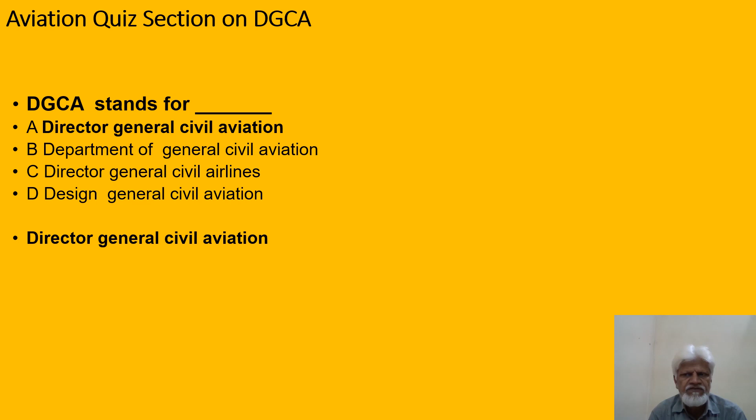The first one: in a quiz, if it has been asked the elaboration of DGCA, it is Director General Civil Aviation. Head office is at New Delhi.

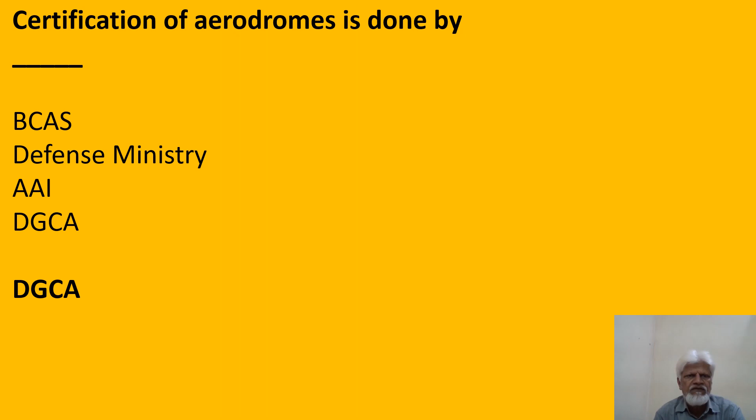Issuing of license of pilots, aircraft maintenance engineers, air traffic controllers, flight engineers, and conducting examinations are being done by DGCA.

Conducting investigation into incidents, serious incidents involving up to 2,250 kgs all-up weight, and taking accident prevention measures including formulation and implementation of safety aviation management programs, is also done by the Director General Civil Aviation.

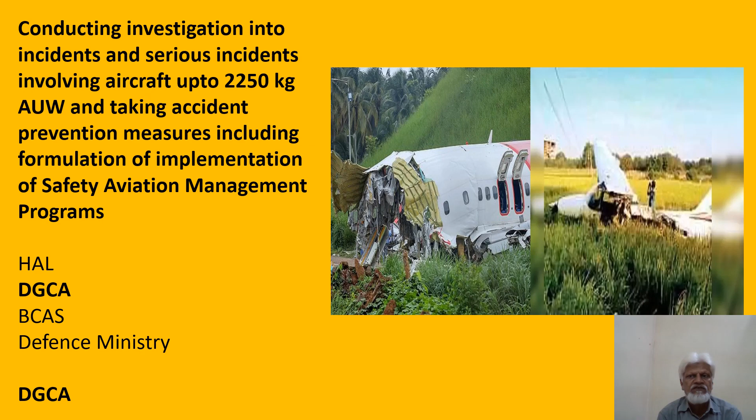Promoting indigenous design manufacturing of aircraft components by acting as a catalytic agent. DGCA, the AED department, does it.

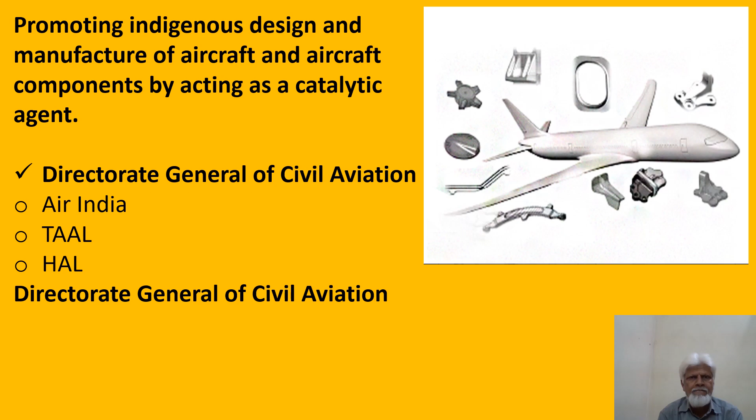Approval of institutes engaged in flying training, that's your flying clubs, training of cadet pilots, the SPL, is done by DGCA.

The role of Parliament and Coordination section of the DGCA is to address all the parliamentary matters like notices, questions, circulation of provisional calendars, guidelines, procurement and dealing with parliamentary questions, action taken reports, minutes of senior meetings, updating Civil Aviation Ministry for Parliament questionnaires.

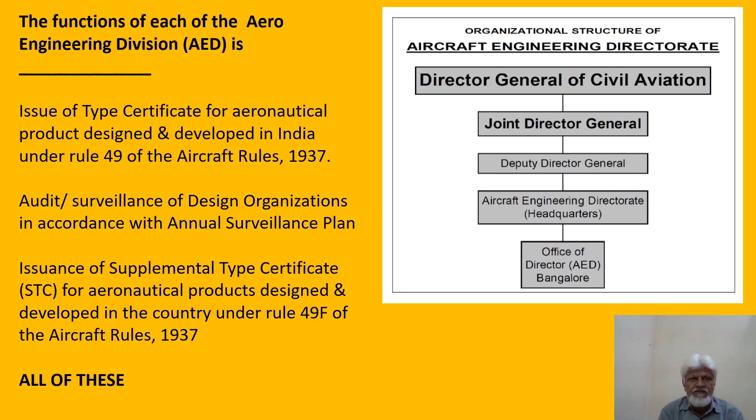Flight data recorder or cockpit voice recorder, also called black box. The role of the Flight Recorder Laboratory of DGCA is to engage in monitoring of CVR and DFDRs for the purpose of ensuring continued airworthiness of recorders and crew performance.

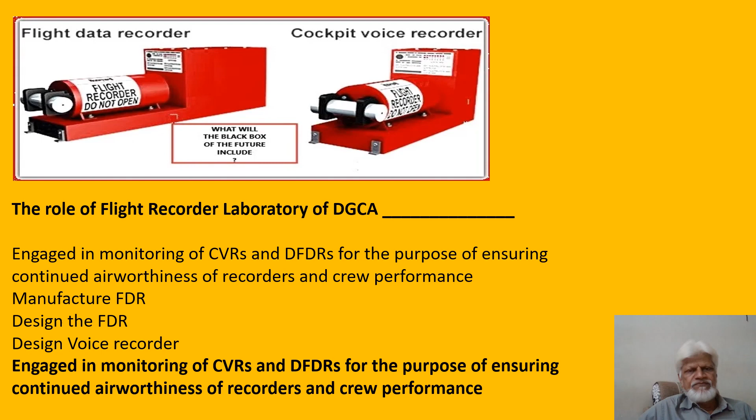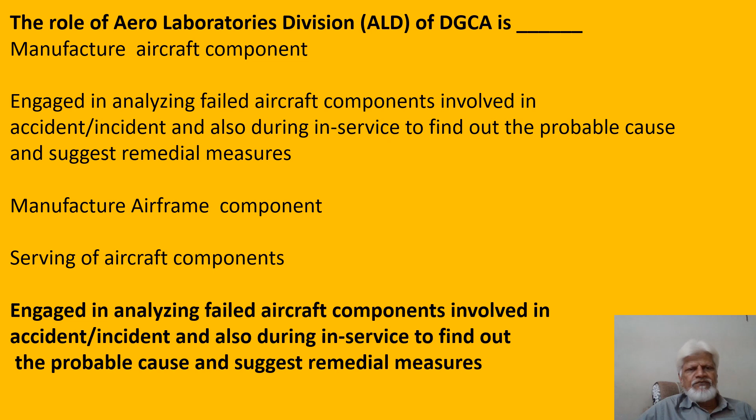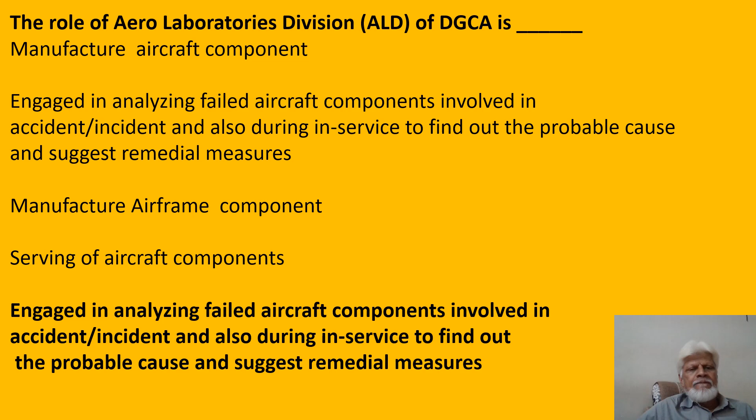The role of Air Transport Division, ATD of DGCA, is approval of flight schedules, scheduled domestic airlines, Indian carriers for international operations. All are right.

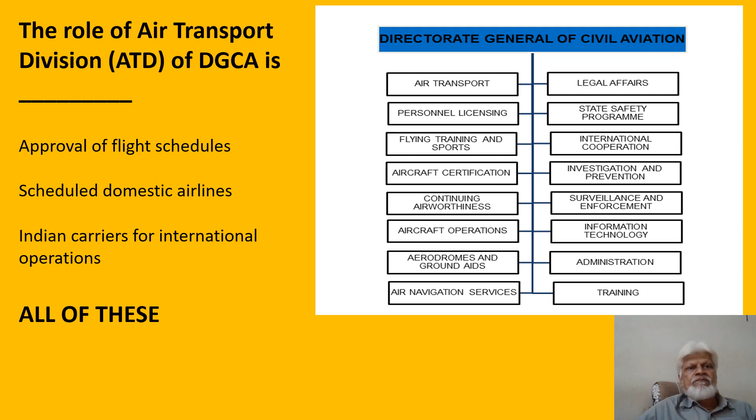It's been mentioned here, the departments of DGCA. Review of preparedness of Indian carriers to new international destinations in respect of operation, engineering, safety, security, ground facilities, is being done by the Air Transport Division.

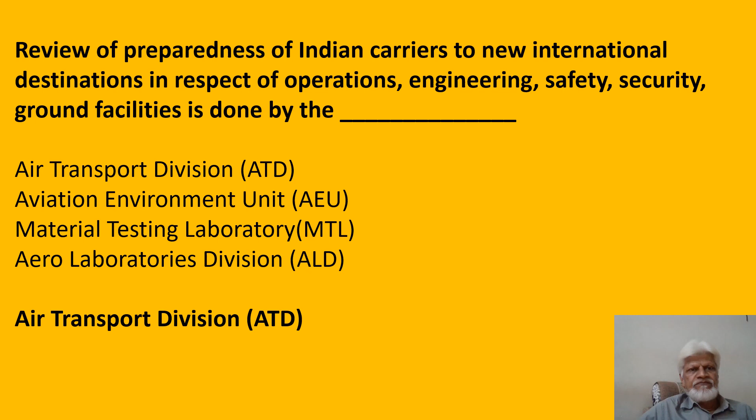The function of the Aviation Environment Unit, AEU, is to take care of environmental factors, to disseminate the guidelines and measures adopted by ICAO to stakeholders in respect of environmental protection, in terms of carbon emission, noise pollution; certain standards have been laid down by ICAO.

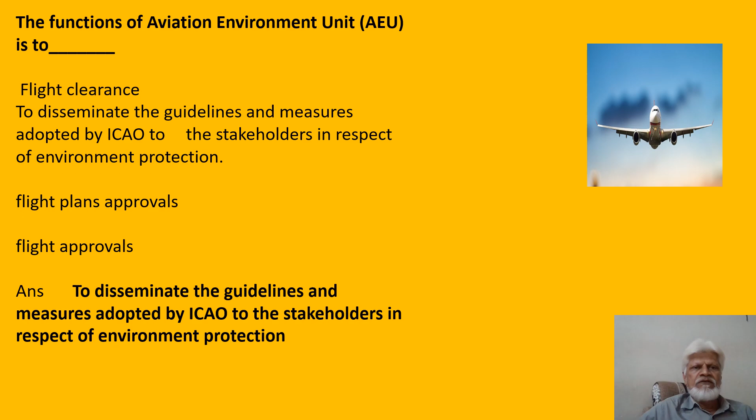The main function and responsibilities of the Airworthiness Directorate of the Headquarters DGCA is all the above, what they maintain here.

Develop national legislation, standard, policy, guidelines, examine the changes in ICAO, the aircraft rule, the civil aviation requirement CAR, filing of appropriate differences, establishing work relationships. All the answers are right.

The Flight Standards Directorate in DGCA is entrusted with the responsibility of certification of air operators, that is your airlines, designee oversight, and PEL support.

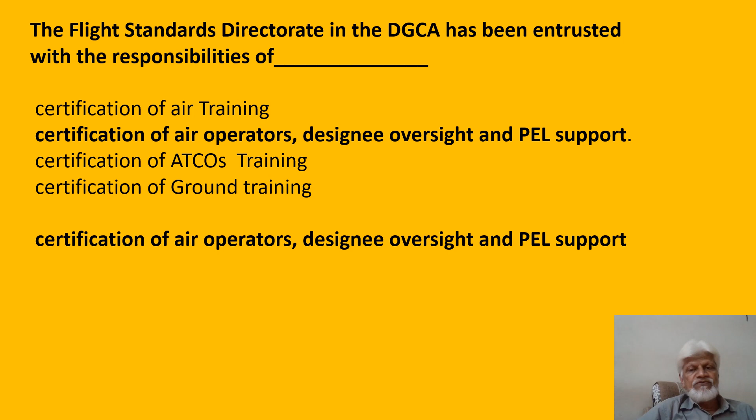Official website hosted of all government owned organizations, not only DGCA. The right answer is NIC. Always the website will be having an extension NIC, that is National Informatics Center.

DGCA is a part of the Civil Aviation Ministry. You can see the Civil Aviation website; this is the Director General Civil Aviation. They have BCAS, the Airport Authority of India, Air India, AERA, and various others.

Function of DGCA is registration of civil aircraft. They don't fly, DGCA officials don't fly, they don't see the aircraft. They only see and observe or receive the aircraft. The main function is they are involved in registration of civil aircrafts.

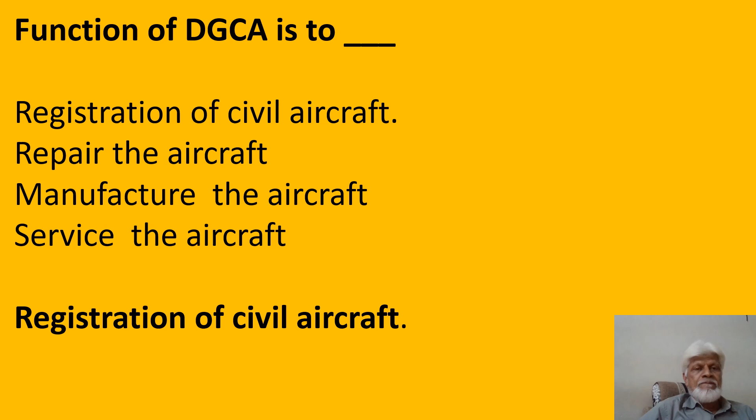Directorate of Airspace and Air Navigation Services Standards is responsible for all this: revision of CAR, ANS, ATM, CNS, MET, AIS, aeronautical charts and SAR. Issue of CARs in the field of ANS - ATM, CNS, MET, AIS, aeronautical charts and search and rescue. Ensure proper implementation of CAR related documents, manuals and directives.

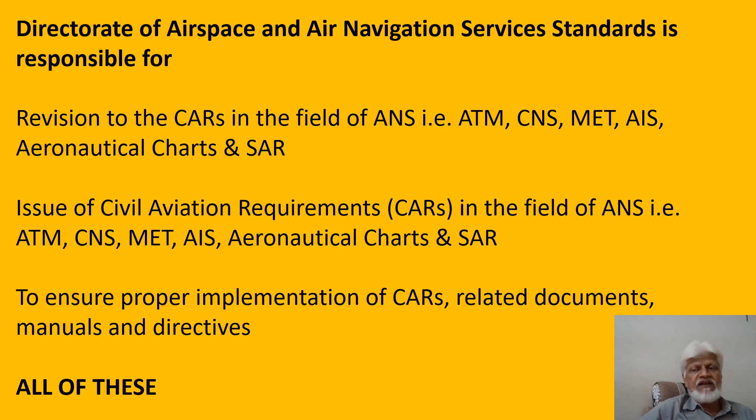Investigation of civil registered aircraft incidents is done by the Air Safety Directorate of the Director General Civil Aviation.

The role of Central Examination Organization is that they are responsible for conducting various examinations in accordance with Rule 61 of Schedule 2 of Aircraft Rule 1937.

The licensing of air traffic controllers and approval of ATSTOs is done by the Director General Civil Aviation.

The role of Meteorology, that is India Meteorological Department, located at Pune, under DGCA, is to amend the DGCA CAR from time to time to ensure compliance with ICAO Annexure on Meteorology, Annexure 3. They basically give all the weather conditions like wind direction, rain predictions and all. They play a very important role in airline operations.

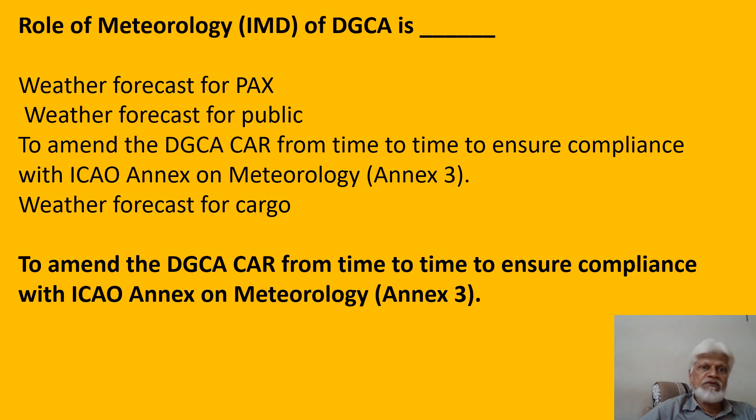The responsibility of Directorate of Flying is approval of flying training organizations.

The headquarters of Director General Civil Aviation is situated in New Delhi.

Meaning of civil enclave means an airport which has been fully controlled by the Ministry of Defense, that is all three forces. Only the terminal building will be operated or maintained by the Airport Authority of India.

DGCA Office of Directorate AED is situated at Bangalore. Basically, they are into aero engineering developments and research and development, because the majority of companies are there in Bangalore.

Office of Director Aerodrome Standard is at Delhi, Calcutta, Chennai and Mumbai. Training and License Directorate is also at Delhi, Calcutta, Chennai and Mumbai.

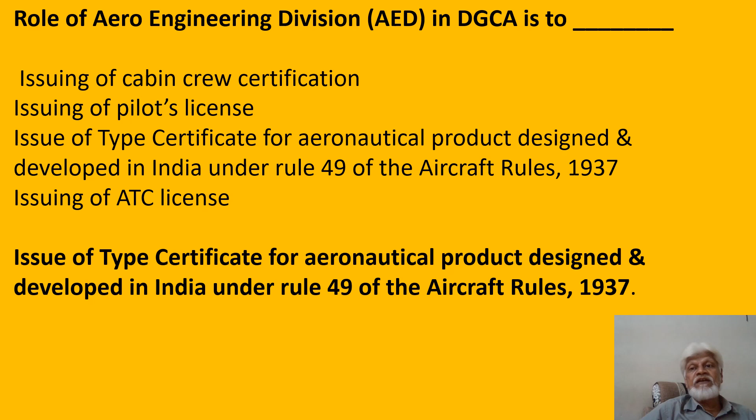The vigilance section of the DGCA handles appeal review of disciplinary vigilance cases, issue of vigilance clearance to airport entry passes in respect of officers of DGCA, court cases, RTI matters, and public grievances related to vigilance cases. All are right.

The International Cooperation Group, ICG, in DGCA handles all international programs with international organizations on matters related to policies, technicality, and safety matters with the aim of enhancement of aviation safety in India.

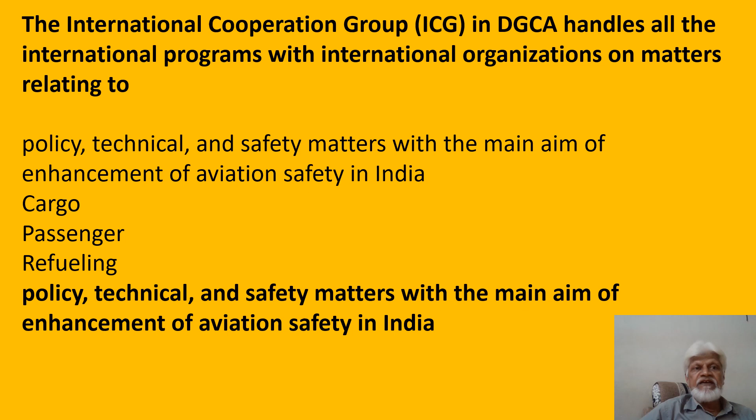The SSP SMS division operates under overall chairmanship of the Director General for assisting the steering committee in preparation and implementation of SSPs, coordination, monitoring and reviewing of implementation of SSP, and any other work related to SSP, SMS as assigned by the Director General Steering Committee. All of these are right.

The DASH in DGCA covers functions related to ICAO Annexure 6 on operations of aircraft, and to a limited extent Annexure 8 on airworthiness, and Annexure 1 for personnel licensing - this is the Air Operator Certification and Management Bureau, AOCMB, which takes care of aircraft operation, airworthiness, and licensing of pilots.

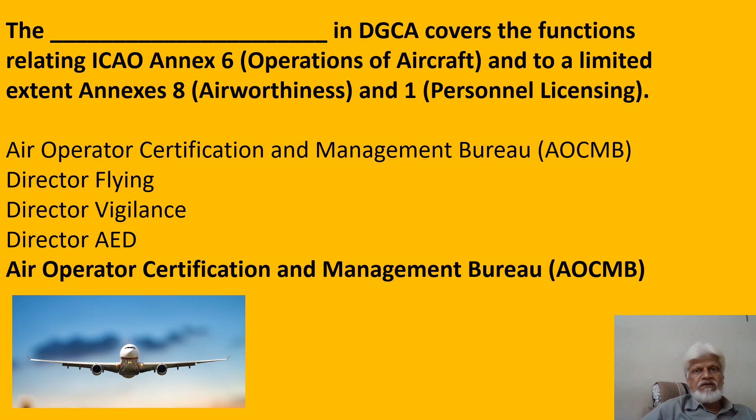The AOCMB is headed by the Joint Director General of Civil Aviation and supported by Flight Standards Directorate. He is the Chief Flight Operations Inspector, the CFOI.

Aerodrome licensing is done in accordance with Aircraft Rule 1937, Part 11.

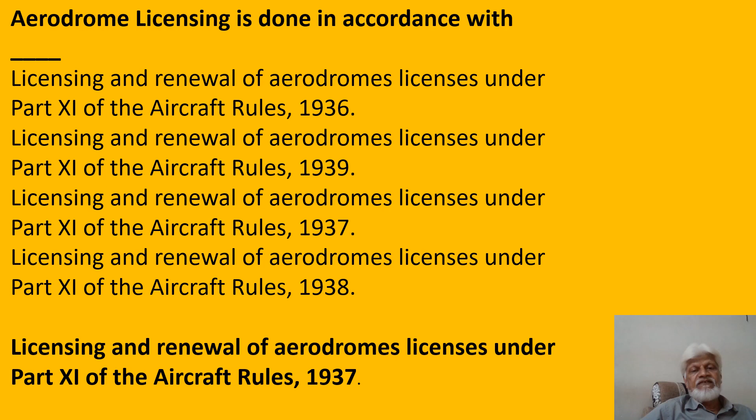Surveillance, inspection and safety oversight of aerodrome is done in accordance with the conditions mentioned in the aerodrome license under para 83 of Part 11 of the Aircraft Rule 1937, and are complied with all the standards.

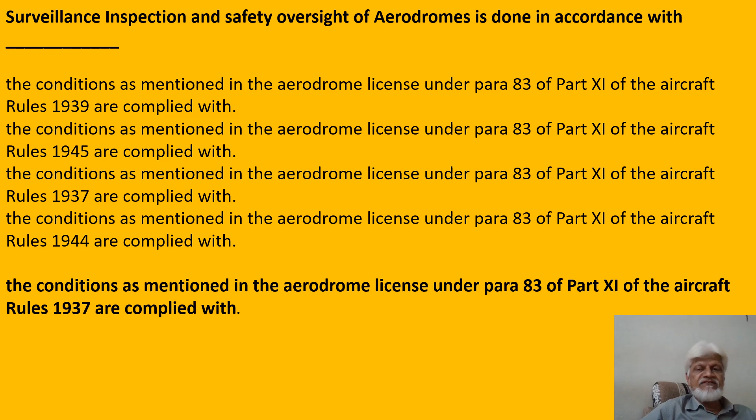Development of surveillance mechanism and resolution of safety issues in respect of ATCOs and ATSTOs is done by the Director of Airspace and Air Navigation Standards of the DGCA. Basically, they are the people who authorize these air traffic controller officers.

Investigation of civil registered aircraft incidents is being done by the Air Safety Directorate. Regional air safety offices are located at Delhi, Mumbai, Hyderabad, Kolkata, and Chennai.

Issuing licenses to pilots and aircraft maintenance engineers, and approval of flight dispatchers, is being done by the Director General Civil Aviation. ATPL is Airline Transport Pilot License.

DASH is responsible for conducting various examinations in accordance with Rule 61 of Schedule 1 of the Aircraft Rule 1937 - that is the Central Examination Organization, CEO of DGCA. This is a website from where you can log into the online examination portal.